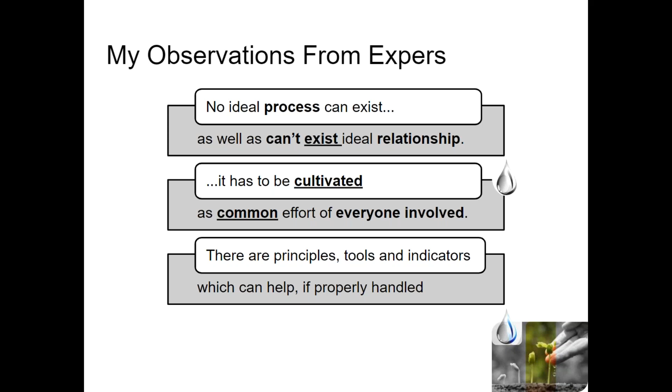There are principles, tools, and indicators which can help if properly handled. It's very similar to harnessing and growth of natural stuff. What benefit will we get from being here?

First of all, I calculated that when participants were preparing for the event and broadcasting it, they spent more than 30 hours of total presentation time, and preparation took more than 3 months.

And if you look at the history of development of the industry, it covers more than 100 years.

As an additional benefit, you look at the challenges suppliers have in technical methods and solutions, and how they manage processes, what problems they have with processes, and how they handle international standards.

Of course, we updated just a bit - I cannot cover everything. You get some updates about news, process and compliance improvement, and definition of process and models.

But before we continue, who knows what VDA is in this strange word? And who knows what intacs is? No one knows, right? Now you get one more benefit - you will know at least this basic term, because in automotive it's fundamental for quality.

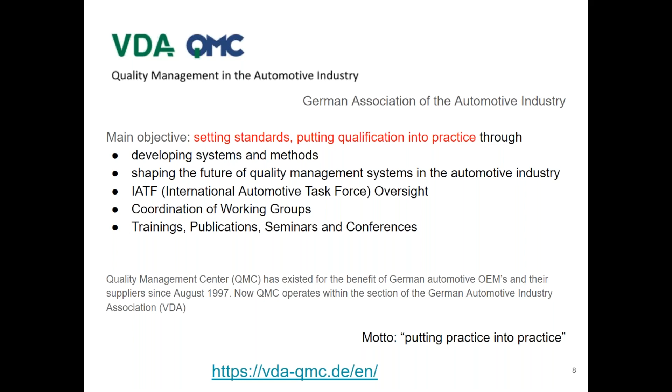With this objective, VDA QMC develops systems and methods. Basically, it shapes the future of the quality management system for automotive. It also has oversight of IATF - International Automotive Task Force. You will see a bit about this standard later on, and it's a combination with SPICE. It coordinates working groups, trainings, publications, and conferences. At one of these conferences, I recently attended, and their motto was: putting practice into practice.

Another term is intacs. When you're reading or looking at some certificates, you've probably seen this logo. It's the International Assessor Certification Scheme - an independent and legally registered non-profit association.

So it's like a community of assessors. Everyone cares about process improvement, and the main objective is high quality assessment through training, certification standards, and checking assessor competence. Actually, if someone comes to you and wants to assess you officially, you can check their ID card, and on intacs.info, in their database, they have all certified assessors.

And moreover, to intacs you can complain if you don't like or don't agree how someone assessed your project.

Again, I visited workshops of lead assessors. I'll also share highlights from a questionnaire which was sent locally to those who appeared. From your expectations and in just a few words, everyone cares about looking at how process and problems are in automotive, and what is SPICE, and knowledge is basically the keyword.

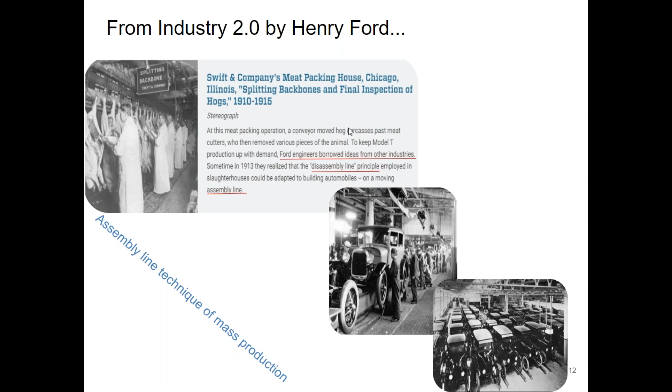Actually, it started with looking at meat packing houses when they disassembled meat. So he looked at the process, and the Ford engineers borrowed the idea from the disassembly line of meat to the assembly line of cars. The second industrial revolution started with the assembly line technique for mass production.

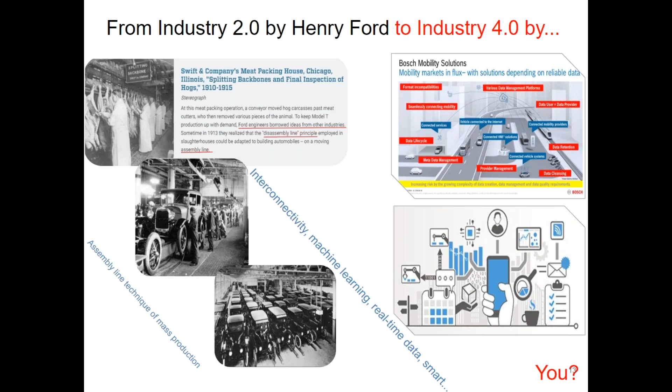And now it's Industry 4.0, which includes all interconnectivity, machine learning, real time, all the smart stuff, and it actually generates a lot of data and needs new roles or improvement of new roles, and needs to align all this big amount of data.

And there was actually one presentation from Bosch, Data Quality Matters, where they proposed some approach to measure the quality of data.

Why? Because organizations live and die by quality of data, and the more digitalization, the more important quality of data becomes. The automotive business already has proven processes for managing software development, but there's a gap in measuring quality of data, so they start to develop this standard because complexity increases.

You will see a lot of complex stuff today, so get ready for this. But increasing complexity increases risk. If something is complex, what's the risk? More bugs? Yeah, somebody will die, or maybe both, more bugs and somebody dies.

So they propose this structure, they try to apply a SPICE process for data management issues, but they did not succeed, and they proposed a data maturity model for checking quality of data. I will not stop too much on this, but this model just compares a reference model, which is good quality data, with another model, which is actual data.

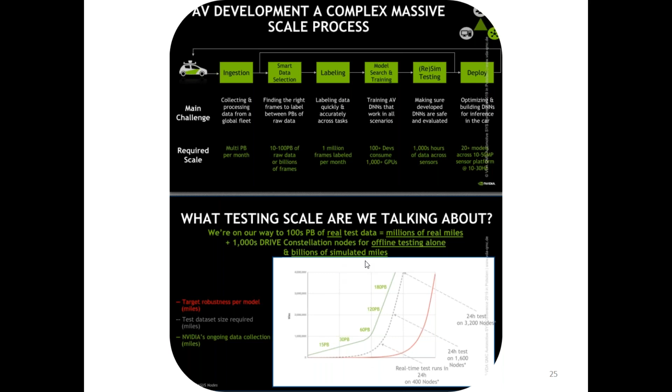Next session was challenge of new supplier management from Honda. And before I go to slides, let's try... I'll show you some videos.

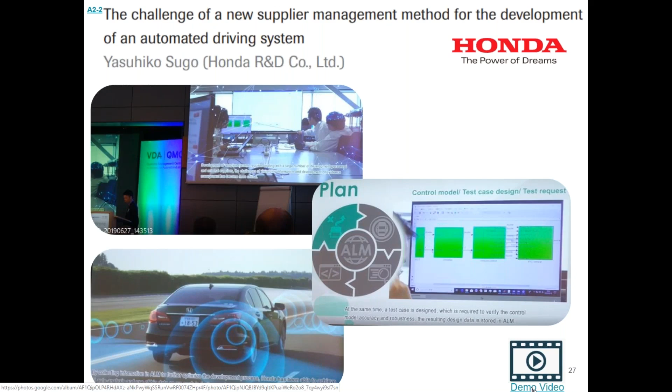The ongoing digitalization of automobile development and production is resulting in a massive increase in volume and complexity of the software developed to support connected, automated, shared services and electrification. Additionally, the amount of data created in such development processes is massive. Development of complex systems requires dealing with a large number of development personnel and external suppliers. The challenges of visualizing information and development of evidence management has become more critical.

In response to these challenges, Honda has been utilizing Application Lifecycle Management, or ALM. Let's take a look at how we utilized ALM functions while applying the PDCA cycle to the Automated Driving Development Program.

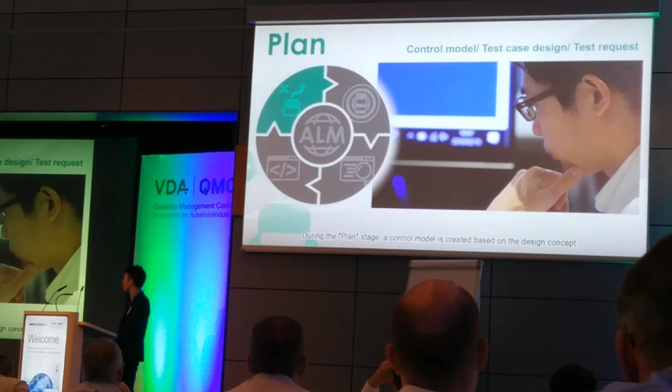During the plan stage, a control model is created based on the design concept. At the same time, a test case is designed, which is required to verify the control model accuracy and robustness. The resulting design data is stored in ALM.

During the do stage, the control model is simulated with the vehicle model to cover a wide range of scenarios. After the simulations are executed successfully, an ECU prototype is integrated with the hardware for bench testing. After successfully validating the control design on the bench, the control design is implemented on actual vehicles and subjected to testing on public streets.

During the check stage, the results of the driving scenarios on bench and public streets are reviewed and analyzed in the ALM system.

During the action stage, solutions are requested from the development team to address the results of bug analysis. During this process, smooth communication with development partners and suppliers is critical.

ALM allows the teams to visualize and share all information, such as accumulated driving conditions data, bug analysis, control model updates, and test requests. This development cycle is repeated to advance development until all bugs are resolved, while all aspects are managed within the ALM platform until development is fully completed.

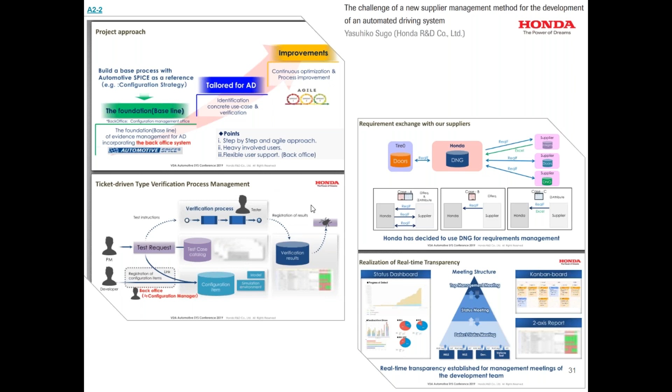They involved users very much, and had user support in a back office. They used a verification method which is ticket driven - it's not shown well because it's not presented in the material I shared, but to give some information, it's actually a plan, do, check, act cycle shown by these arrows and indicators of the tool set.

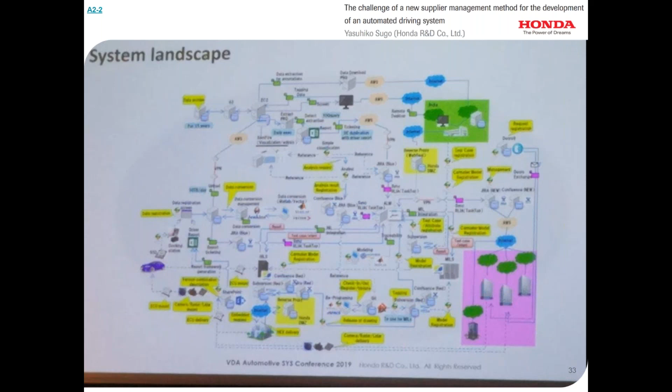Before, they could not evaluate the capability of their suppliers, and it was difficult to identify root cause when some problem occurred. After they changed the approach, they have been evaluated using SPICE, and root causes and processes for any problems occurring, they detected, traced, and closed.

Honda has requested suppliers follow their quality standard, and now most suppliers accept automotive SPICE assessment because it can be commonly used.

As you know, SPICE is more common for German companies probably, but I will show that all over the world - in Japan, US - it's more and more widely used.

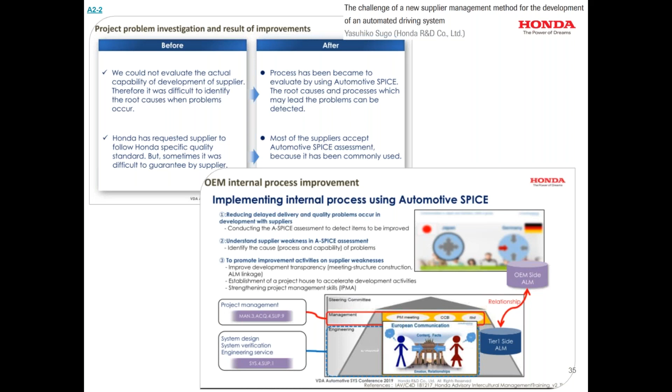They actually implemented an internal process using this automotive SPICE basis, and they even proposed some improvements to this process. For example, for project management, they proposed multi-location project management and a common platform for information sharing.

So how to fulfill the requirement of automotive SPICE and another standard which I mentioned at the beginning, IATF 16949.

It was the next topic, and actually some questions in the questionnaire were related to SPICE. We don't have separate training for SPICE, but there was a good overview, so I'll briefly tell you for those who don't know. SPICE is Software Process Improvement and Capability Determination, an international standard used to identify possibilities to improve development processes and to check the capability of development processes of different suppliers. It covers not only software but also hardware.

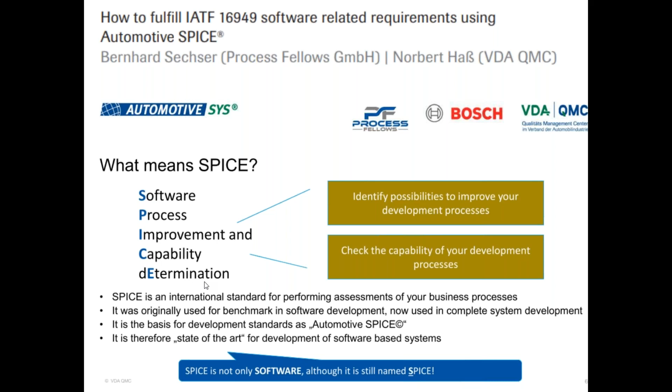The structure has areas for capability determination and the process dimension. Capability determination means how mature the processes and suppliers are, and process dimensions define which processes have to be placed and which outcomes they have.

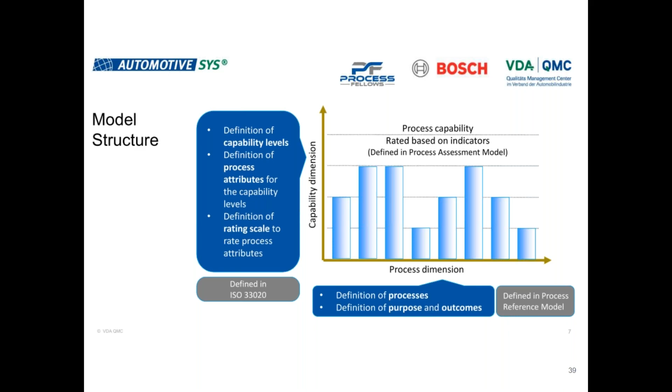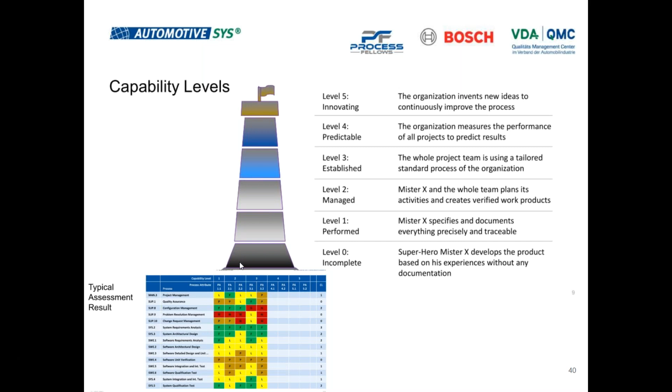There are levels of SPICE. You often hear someone achieved level 1, 2, or 3. Level 1 is when someone specifies a document and it's already traceable. Level 2 means full teams can plan activities and create products which are verified. Level 3 means the full project team is using a tailored standard process from the organization. The official assessment results look like this.

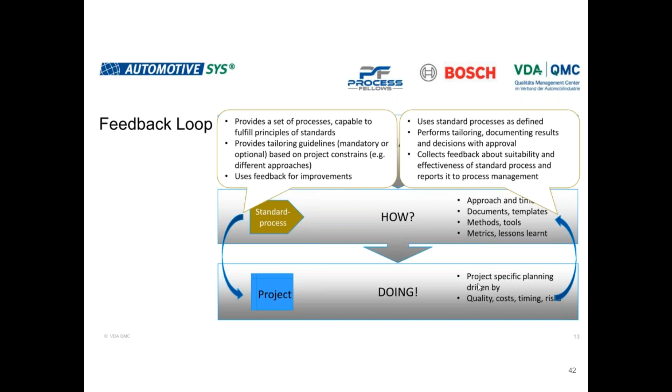The standard defines how, and the project actually defines how it is done. There's a feedback loop used for improvement. Here's an example: an organization developing a product with embedded software shall use some quality assurance, which is SUP 1 in SPICE, and a software development assessment methodology, which is SPICE itself. To achieve capability, the organization's process has to be assessed.

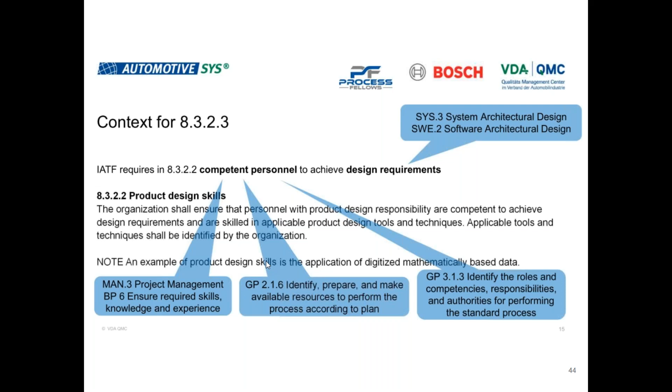This slide is from another speech, but I put it here because there's one more publication from VDA: Automotive SPICE Guidelines, which explains many processes in detail and how to assess them. Usually projects have some legacy software or third-party software, and when something was already developed, you need to confirm it's compliant to process. Pure SPICE is not equipped well to handle this. Automotive SPICE Guidelines try to explain and help with it, but it's not the end, because there's still a problem proving that what was developed could have been developed from scratch by an ideal process.

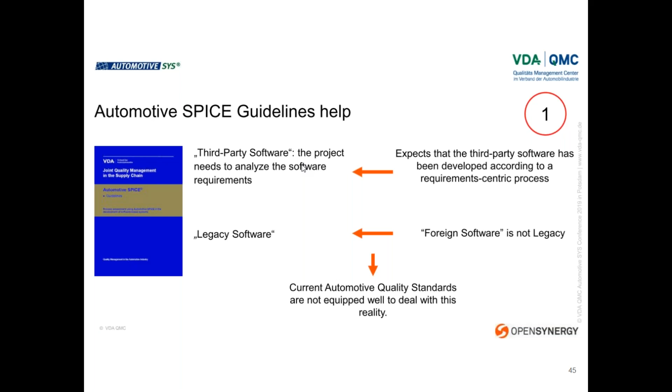As I mentioned, an ideal process doesn't exist, so if it wasn't developed right, it's hard to prove that it's compliant.

Some guys from Italy, Fabio Falcini and Giuseppe Lami, provided training for us. They work at an Italian software development institute and proposed a method to explain processes to everyone in a more human, natural way, because they think process models aren't automotive enough—they were borrowed from other ISO standards.

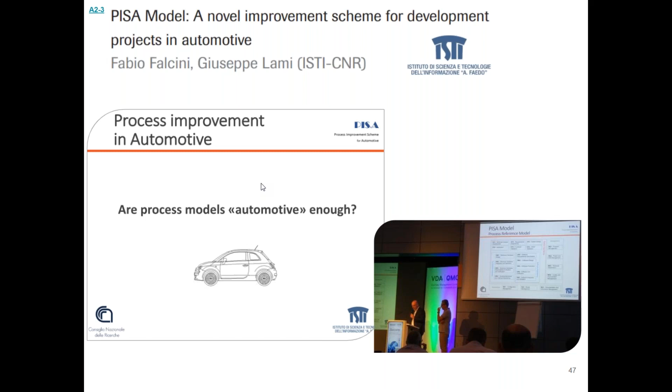So it should be as simple as putting something in a shopping cart on the web. They focus on key points with a balanced approach, expecting it to be like an envelope over existing standards.

From 22 processes, they grouped them into 5 segments and related the segments accordingly, proposing the so-called APRIL acronym for model content drivers, which means the same approach as used in standard functional safety—it's risk-based, so where there is more risk, more attention should be put first.

This is the adequacy attribute, which uses best practices and requires organizational support and technological innovation. So they regrouped processes into segments and did examples. For software requirements management, for instance, they created methodics including description, improvement tips, tailoring criteria, and notes—more like guidance for people on how to apply it in everyday work.

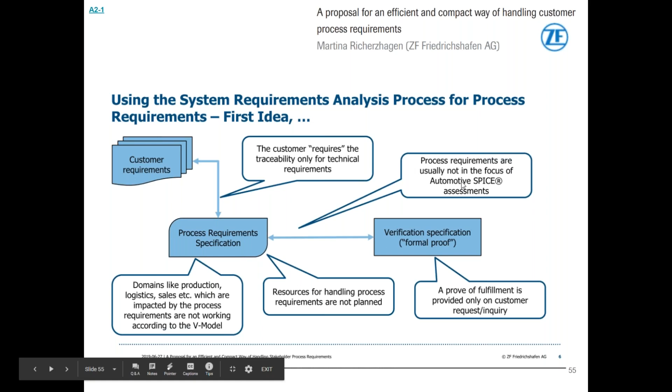So they try to apply system requirements analysis process for process requirements. The first idea is they analyze customer requirements and customer requirement traceability, and they have to map it to the SPICE standard and to their internal standard.

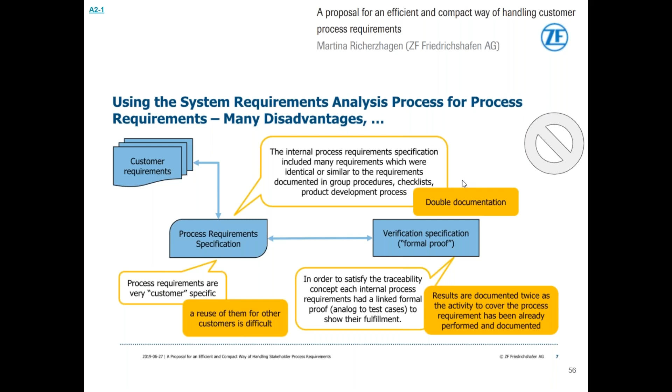So it was not working for them because the customer process requirements were very customer specific, and reuse was difficult. The internal process also describes some stuff which existed, so it was double documentation. And to satisfy traceability, it was a huge amount of work.

Some suppliers are responsible for system parts, some, for example in the USA, some part like GlobalLogic responsible for software part, another part globally responsible for hardware. So it's all located, and when it needs to be translated, because of complexity there is a risk of wrong interpretation and risk for the end process. For suppliers, there is a risk to fulfill and understand this requirement.

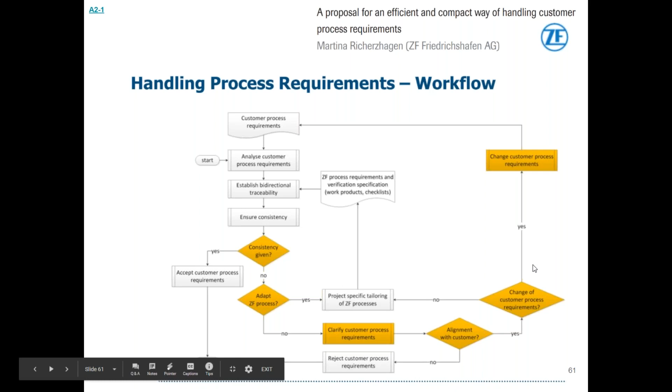So the approach from ZF was to handle process requirements with some workflow. I will not talk much on this because it's complicated. So they did verification of the specification, then established an analysis and traceability to their processes. And if consistency is not achieved, they adapt and update their own processes, and align with customers only in case they really prove that the customer requirement to the process was not good. So they actually propose to formulate correctly customer requirements of the process. And so the loop...

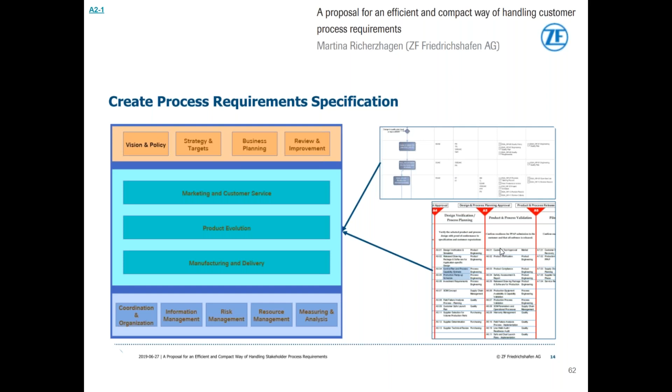They did this with some tools, using stages, DOORS, and some other systems. They put links to maybe process descriptions. To analyze process requirements, one example of how they do this kind of requirement, functional and non-functional, is the process part of the requirement and the role responsible for this. They check consistency and link to requirements of their systems.

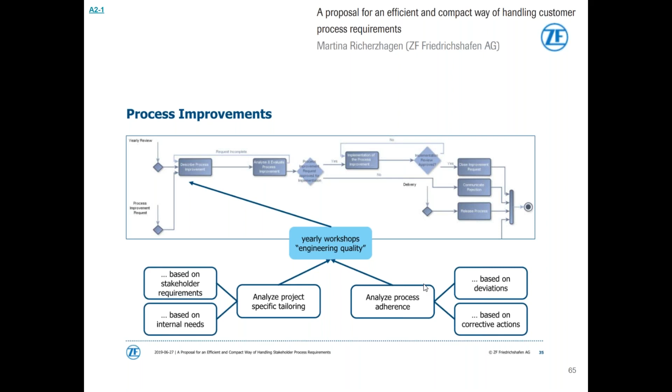And they do yearly workshops called engineering quality, where they analyze project-specific tailoring based on internal needs of projects, and they analyze process adherence and make advice and corrective actions. So the benefits from their approach: no double documentation, clarified responsibilities, they reuse a lot of already written documentation, and they have metrics in place. 100% coverage is not possible because there are still some not completely defined requirements.

From Magneti Marelli, there was a presentation on how organization for ASPICE can help fulfill IATF 16949 requirements. By the way, Magneti Marelli, from kind of news, it's an Italian company. They merged with a Japanese company called Calsonic, and now it's not Magneti Marelli, simply Marelli company.

So what issues did they have? Their people didn't know the procedures and templates to be used in processes. It's something that could be common for many companies. Many remarks from team members. They didn't know tailoring rules, how to adapt processes to their work, and the development process is still very complex and documentation heavy and difficult to maintain, and best practices and quality culture had difficulties to remain well established across the whole company.

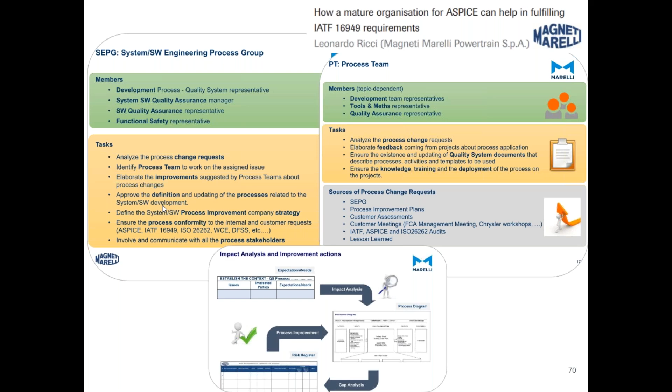And this bigger team, the quality system representatives, consists of managers and functional safety representatives, covering different standards, and they analyze change requests for the process and define processes at the company level. Also, it helps to combine several standards. For example, for IATF, there is a requirement for product safety, which says the organization shall have a documented process for management of...

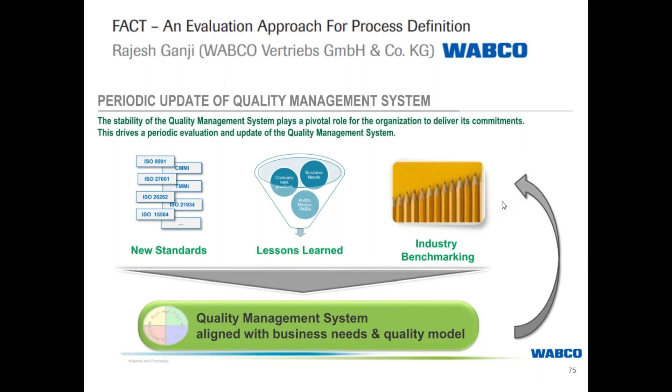So next presentation was FACT, an evaluation approach for process definition. Quality management system has to be aligned with business needs and quality model. And many standards appear, and lessons learned and industry experience and benchmarking resulted in this FACT approach, which Rajesh from WABCO proposed. So basic general approach for process development, which is well known: standards, processes, procedures, templates, tools.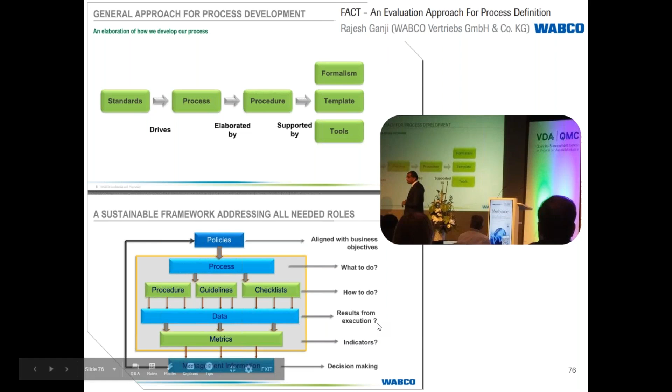So one level says what to do, guidelines checklist how to do, and data reuse or results from execution, and metrics as indicators. So they proposed this template for evaluation of approach.

First quadrant is defining weight of each value, like process purpose, inputs, and outcome. Second quadrant is a list of work products which have to be in place to achieve it, templates, with verification criteria. Third quadrant is adherence to standards in SPICE or ISO 26262 or IATF, and fourth is guidance and metrics.

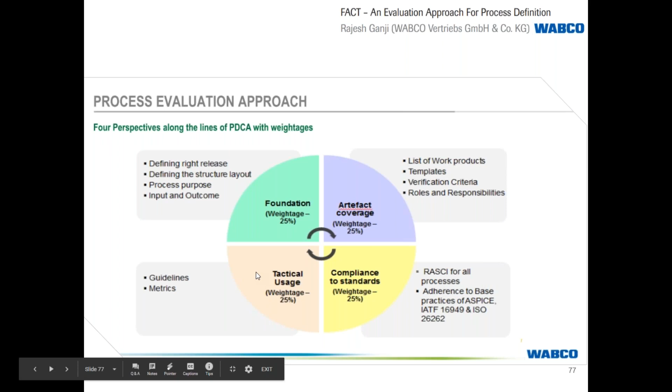So they have this Excel in which cell is these four quadrants, and on basis of these values in cell, they provide this measurement of this FACT acronym, which is foundation, artifact, coverage, compliance, and tactical.

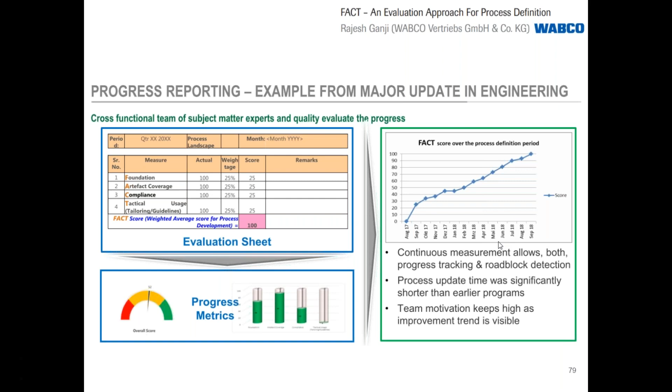And this is their process definition period. They started in August 17 and ended in September 18 with continuous measurement. And let's say the team motivation is higher when they constantly see the progress with the quality.

But metrics can collapse, because Goodhart's law for economics says that any observed statistical regularity will tend to collapse when pressure is placed upon process, and actually many people work under pressure.

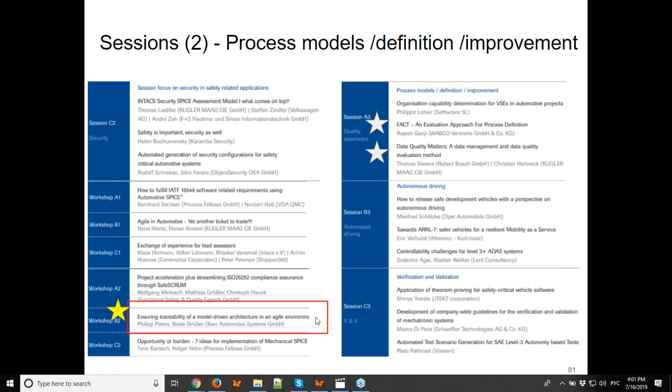The company name is IBEO. It started its history, its cooperation contract with Valeo in 2010, and they develop systems for autonomous driving, different sensors. They started to cooperate with ZF, which became shareholder of IBEO in 2016, and now IBEO produces a lot of stuff for different cars. And the aim of the autonomous driving system is to achieve level 4 to 5 for serial application.

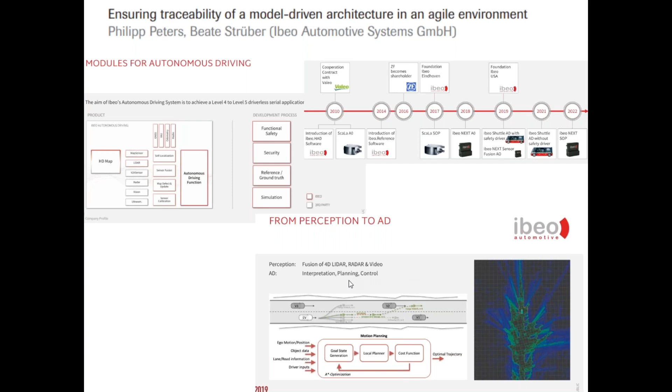Autonomous driving level 4 and 5. Level 5 is when the car goes by itself, yes. This red highlights what IBEO is, and this gray is what third-party deals with. And the perception is fusion of 4D lidar and radar video, and autonomous driving interpretation, planning, and control. Just a general idea about the company.

So for functional safety, they propose the SOTIF approach. SOTIF is an iterative process based on knowledge gained through experience in development. It's based on agile development, where design changes need to ensure safety in a complex environment, and design changes and change requests, especially if there are a lot of them on a project, influence all phases of development, especially when connected to functional safety, which is a more technical standard than SPICE, ISO, or IATF. And classical project planning is slow to react to unknown functionalities.

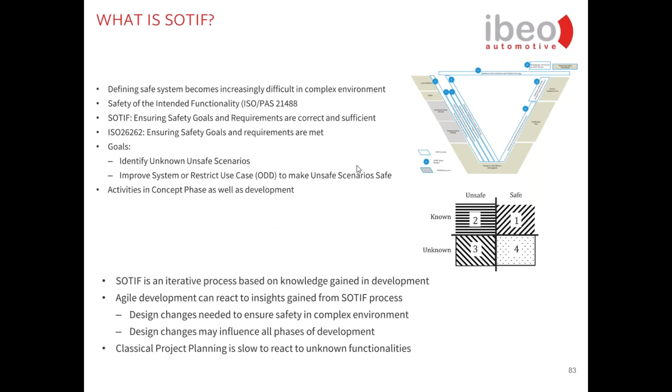So they propose the SOTIF approach to ensure safety goals and requirements are met, and the most important goal was to identify unknown unsafe scenarios and improve the system or restrict use case. So they have it described; the materials can be accessed or requested additionally if necessary. They have challenges in how to achieve effective communication of changes between all levels of the V model, and how to identify changes.

Changes in operational design domain may impact many developers, so frequent updates are not always necessary, because when a team sits together and develops one feature, they know it well, but they don't write it down, and sometimes communication between developers becomes messy. From the other side, communication over a single point of contact slows down the process. How to deal with documentation when change appears, how to link requirements and design levels - all these issues we face too.